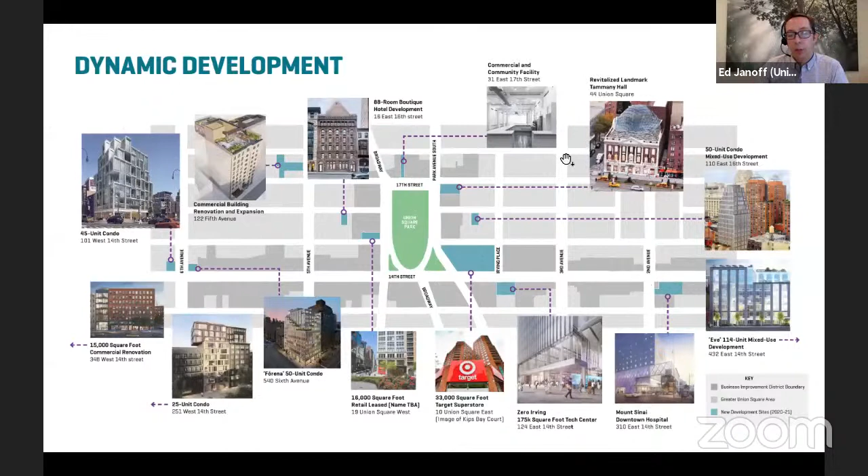We were at subway entrances, in bus stops, in hotel lobbies, really trying to get the feedback from people of all different stripes here in Union Square. And of course, the online survey. So well over thousands of engagements here fed into the visioning work.

I'm not going to go through every single thing that we heard, but just some of the high level feedback. First of all, we heard people love Union Square and they want to see more of what's good about it, which is just always good to hear.

Maybe sort of obvious. Also, our engagement was happening during the period of the conversations about the L train shutdown and the idea of a busway, and so there's a lot of feedback about transportation in particular and concern about availability of transit and connectivity between transit and safety in the pedestrian environment.

We also heard that a lot of people were interested in seeing more greening and more greenery throughout the Union Square neighborhood. And when it came to the park, we heard that there's been work recently and upgrades recently on the north side of the park, the west side, and the south side, but not the east side, that perhaps the east side feels a little bit neglected and needs some more attention.

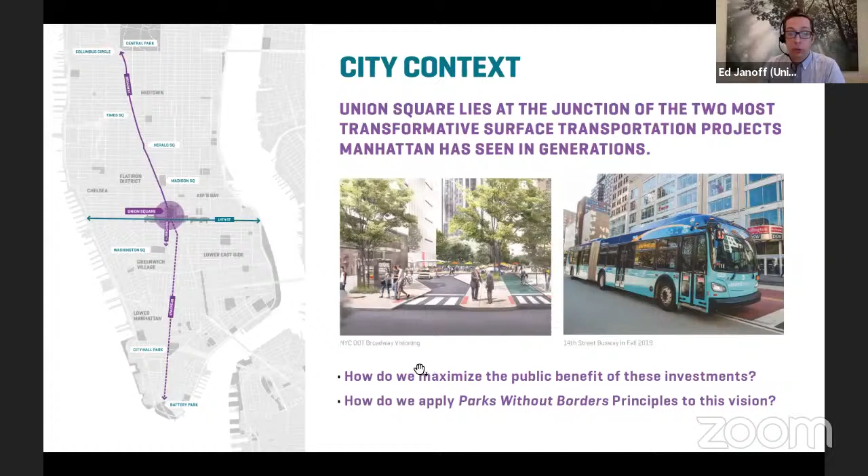So we articulated this vision statement that we think encapsulates some of this feedback and these ideas. The thrust here is really to make Union Square as inclusive as possible and as accessible as possible. That means accessible both in the more literal design sense of being a place that is easy to navigate for people of all ages and abilities, in wheelchairs and strollers, and also a place that provides access to the fundamental features of the neighborhood - access to food, education, healthcare, access to each other, access to New Yorkers. How can the design of the public realm provide that kind of accessibility?

We put together these six goals for the plan. Some of these, if you're used to seeing streetscape plans, you'll see a lot of the time in any neighborhood - increasing pedestrian space, improving access and connectivity, more greenery and open space, historic preservation. But some of these goals are really specific to Union Square.

One is honoring the legacy of the site as a continued place for demonstration and free expression. Second is sustaining the sort of impromptu and organic activities that happen in Union Square that contribute to that really authentic New York flavor that you feel when you're in the space.

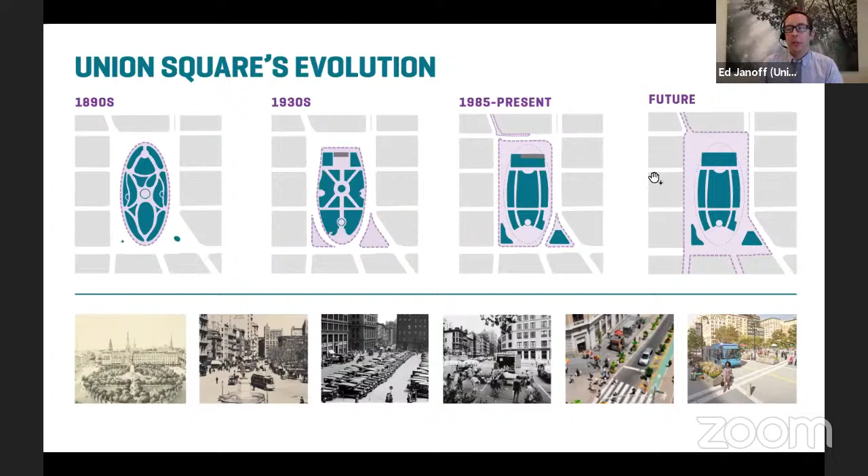So, did I skip a slide here? No, we took it out.

So we asked Marvel, our design team, to come up with a series of distinctive projects so that we could help us organize our thoughts into how we would represent these ideas and how we might actually go about fundraising and building them.

So the 5 distinct projects that I'm going to walk you through here are: first, Union Square West; second, the Broadway Plaza and 17th Street area; third is a 14th Street Boulevard, really not just in Union Square, but continuing east and west throughout the neighborhood. Fourth is the Triangle Park and sort of Union Square East as it connects to the Triangle Park. And then fifth is the park interior.

So I start on Union Square West, and I start here because the design ideas for Union Square West reflect a transformation that is representative of the concepts for Union Square as a whole.

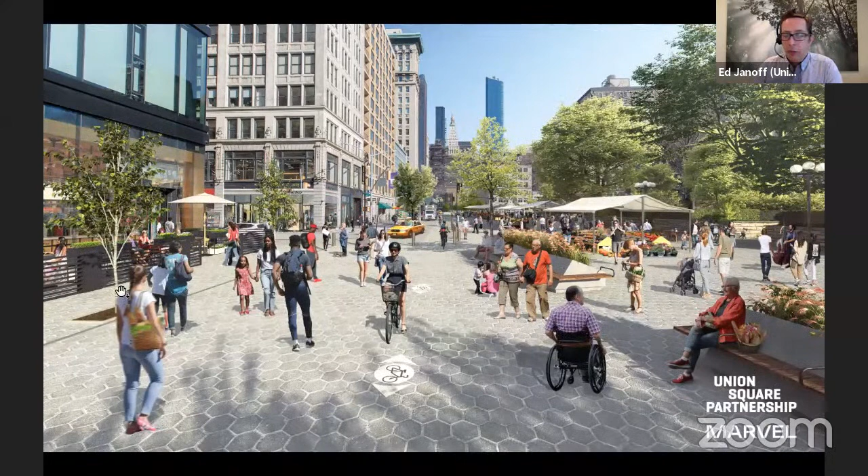So as I go to the after here, what's shown is a continuous paving treatment from one side of the street to the other, all the way from the park to the building edge, and a traversable pedestrian environment that's all at pedestrian grade, integrating potentially a two-way local access bikeway, additional active retail on the ground floor, potentially new cafe space, and more trees along the street and along the park.

We're introducing a concept here that Marvel came up with of a raised planter bench that could allow for additional plantings, flowers or trees, and integrate seating in a way that provides more opportunities to sit and people watch than there are today.

Also showing the potential for some kind of upgraded infrastructure at the Green Market to provide a more consistent look, and maybe a way to not have the line of refrigeration trucks blocking the vistas during green market days.

The space would essentially function the same as it does today. Union Square West would continue to be open to vehicles between 15th and 16th, with the edges of the roadway delineated by bollards to protect the pedestrian space. These bollards would be operable in some manner, TBD, to allow for emergency vehicle access, building maintenance access, etc. A detail to be worked out. Overall, a much more pedestrian-accessible space with more plantings throughout.

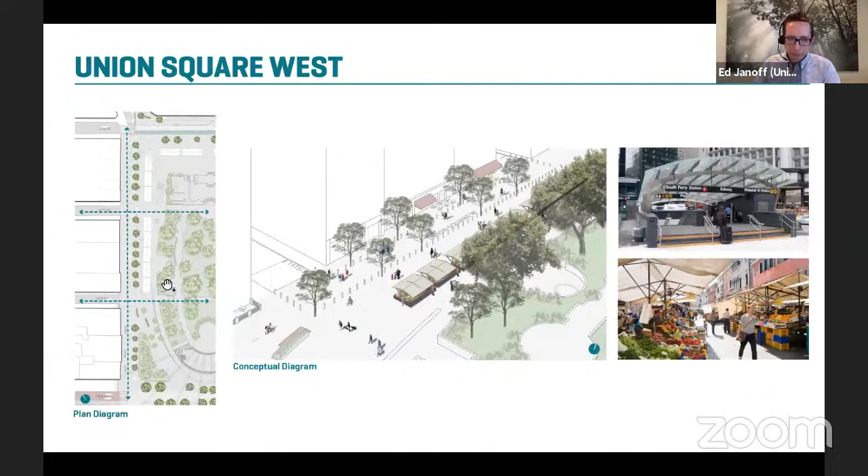You also see in the background, 17th Street continues to move through as a shared street type of space, lower speed, lower volume. And in the background, you're seeing this kind of flexible market infrastructure and the concept of a subway entrance here. Again, it does not have to be that style; the renderer is just borrowed from the South Ferry station.

In plan view and in axon view, really again showing that we're trying to make this a permeable pedestrian space. People like to cross between the Green Market and Barnes & Noble today, but we're trying to formalize that and connect to DOT's Broadway visioning of a pedestrian corridor coming all the way down from Columbus Circle, being welcomed into this gateway to Union Square, where the design starts to unify with the park.

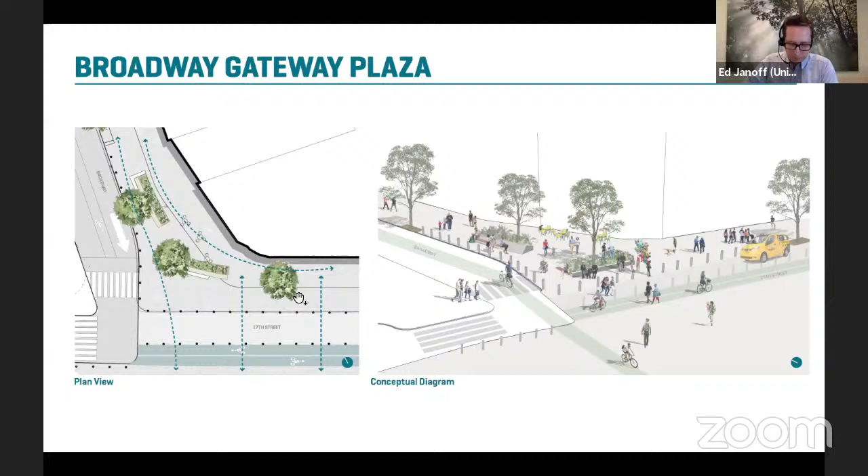Next, I'm going to show you an aerial view of 14th Street facing west at Broadway and the South Plaza of Union Square. The concept on this side is the same, although it's, I think, a much bigger change when you look at it from the aerial view.

The concept is basically the same: unified paving from the park side all the way to the building edge, so that Union Square throughout feels like one continuous space, all at pedestrian grade, with the roadways delineated with pedestrian protection. 14th Street remaining a busway and a local access route.

We heard in the feedback that people in the community were interested in having the open space benefits and greenery of Union Square extended out to the neighborhood, and the design team took that idea quite literally, extending these radial elements of the South Plaza of the square, kind of blasting them out into the neighborhood so that this whole space feels like the South Plaza.

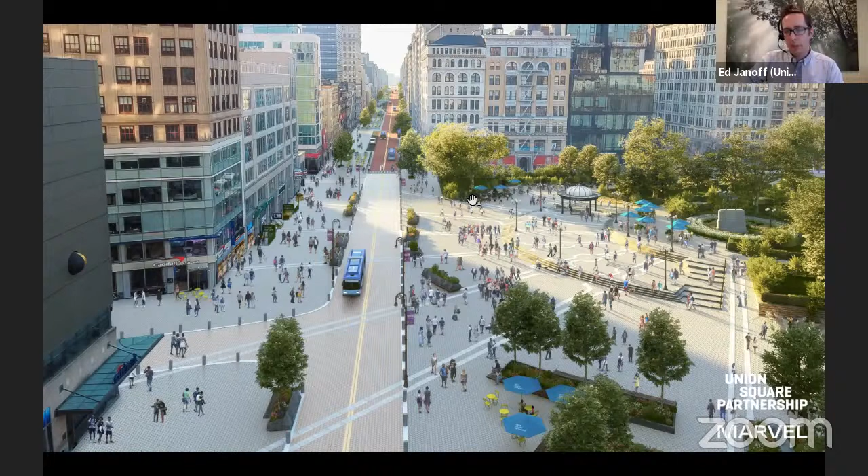And even in this concept, taking this planter bench idea and curving it to mirror the curve of the South Plaza steps, so that this all looks like sort of one South Plaza with a vehicle space moving through it.

This also allows for doubling the sidewalk width on the south side of 14th Street, relieving a lot of the congestion around the subway entrances and providing opportunities for activated ground floor retail. It also doubles the sidewalk width on the north side of 14th Street, just to provide more gathering space, more social distancing space, and more room for pedestrians to alleviate congestion.

This is going to bring you down onto 14th Street to show some of these concepts in more detail. This is 14th Street facing west from eye level, and here you can see the unified paving scheme across the street with the radials pulled out.

The busway here, in this view, you can see that the raised planters can double as pedestrian protection. So you don't have just bollards here, but you can have integrated bollards and planters.

Here you can see the wider sidewalk, potentially activated ground floor retail, and overall this continuous feeling of being in Union Square on both sides of the street.

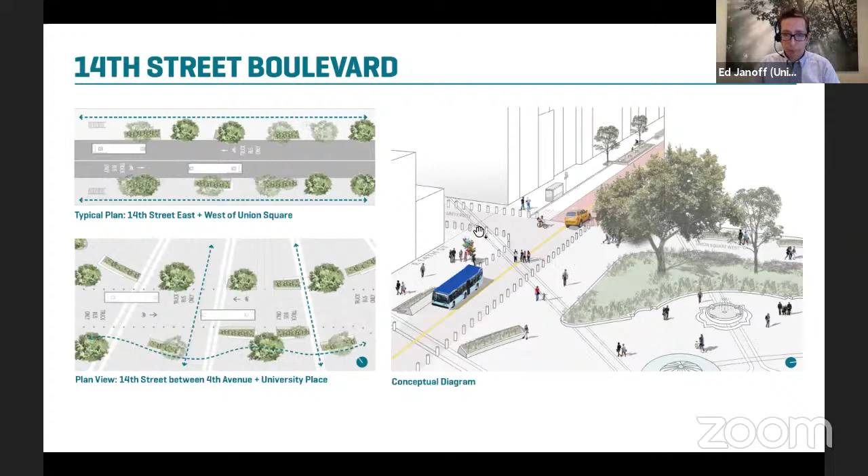And then finally, I'm going to show a concept for the Triangle Plaza, which is at the southeast corner of the park at 14th Street and 4th Avenue.

This was one of the spaces that we universally heard from the community needed to be improved and maybe rethought. So this was really the one part of Union Square that the design team took a crack at reimagining in some way.

What they noted was that it's a space that doesn't have very good circulation. It's got narrow pathways, poor sight lines, no good drainage, no irrigation—it's kind of a dust bowl. And it doesn't really honor the way people want to walk directly to Union Square.

So the concept was—and you can see, I'll use this tree here as a marker for where you are in the before and after—

The idea was to open up the plaza space to through movement going directly into Union Square. So from 4th Avenue and 14th Street, you'd now be able to move northwest through the park, and we would provide more different types of seating—not facing only to the interior, but a mix facing both interior and exterior—seat walls, benches, movable seating, all different types, with a lot more circulation space and pedestrian access throughout.

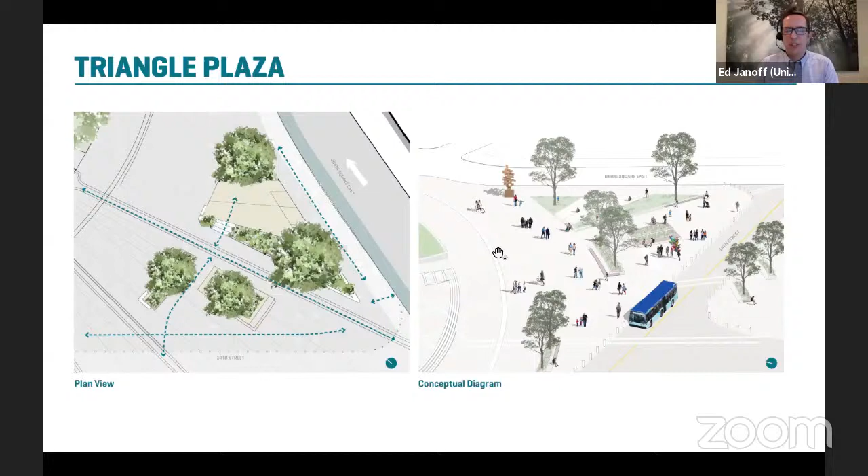That necessitates somehow diminishing or potentially eliminating the northbound traffic on Union Square East. That idea really requires further study, but it's the leading inspiration from the design team, saying this public space might function best if directly connected to the park—with the caveat that this needs a lot more study and could function in many different ways. But it was rendered, for the purposes of nice renderings, as one contiguous public space.

The last significant project of the five was park infrastructure. This is not something we rendered. The idea is not to do anything dramatically different for the interior of Union Square Park, but just to note that it hasn't been master planned in over 40 years, and a lot of the park infrastructure is now aging out, being 30 to 40 years old.

This is sort of a catch-all aspiration in our vision plan, saying the park needs to be renovated—it's a laundry list of needs. The trees, 75 to 150 years old in many cases, are aging, and we need a plan to preserve them but also a succession plan for when they eventually die off.

Renovating subway entrances, landscaping, a dog run—the plumbing is starting to fail, the electrical is starting to fail. A lot of work needs to be done in the park as a whole, probably combined with upgrades to the subway as well.

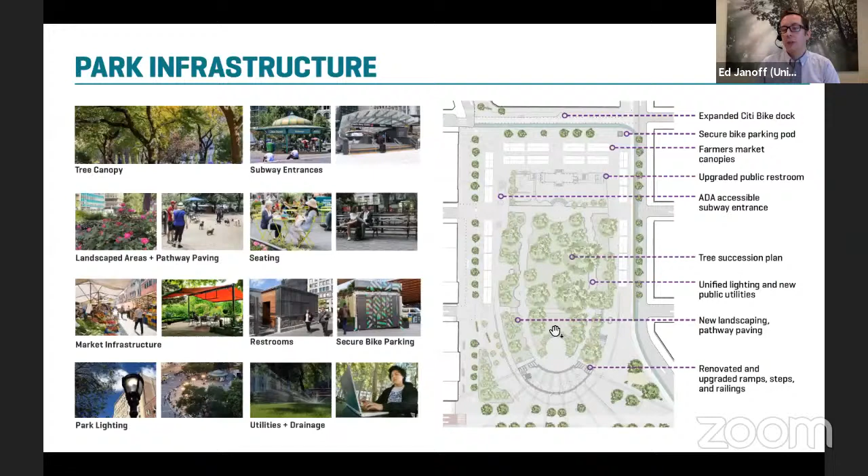Lastly, not one of the 5 major projects but a totally separate idea, the designers proposed a streetscape toolkit—individual street furniture elements that could be deployed throughout the neighborhood, not just around Union Square or on 14th Street, but throughout the whole BID and LDC service area.

First and foremost is outdoor seating. This became especially evident during the pandemic—planning started before it and had to be reevaluated throughout to make sure proposals still made sense. Outdoor seating is of critical importance. We heard that the South Plaza of Union Square is an incredible people watching space in New York City, and on a nice day it's jammed—you can't find a seat, and people want one.

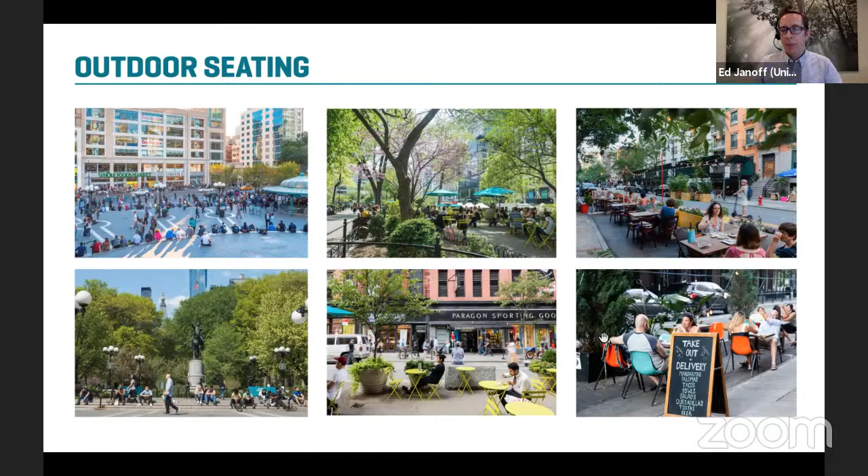So we're looking at a diverse array of seating types and places throughout the neighborhood, including pop-up seating and even cafe seating wherever we can get it.

The main novel seating type this design team came up with is the planter bench. It's a literal interpretation of the South Plaza's great people watching opportunity—how could you replicate that throughout the neighborhood, perhaps on a smaller scale along 14th Street or elsewhere in the district?

Shown here in section, possibly angled, with trees or flowers. We're also trying to leverage DOT's Street Seats program beyond just food service locations—installing these as a BID, maintaining them to provide additional public space and relieve pedestrian congestion. If installed near elevated tree benches or planter benches between two trees, you could create a kind of micro park throughout the neighborhood. Something we're excited to explore.

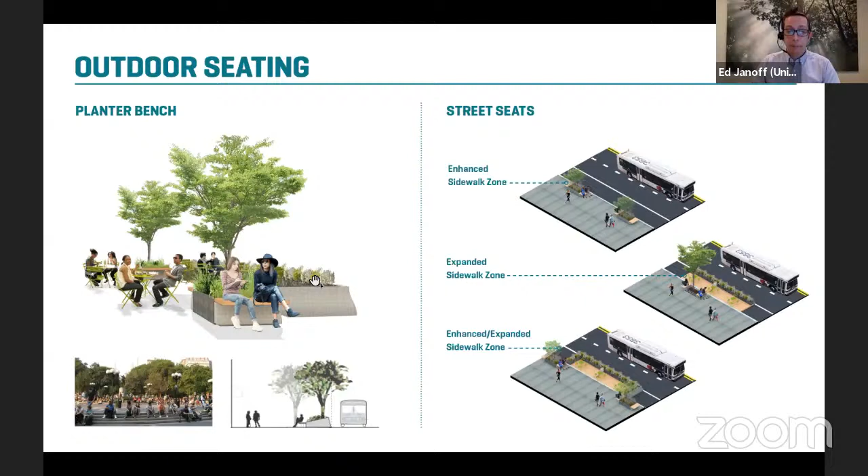Other ideas in the streetscape section of our vision plan: Marvel was one of the design firms that responded to the city DOT and Sanitation's request for expressions of interest for a prototype waste container that collects trash from multiple establishments, keeping it in the parking lane and off the sidewalk, cutting down on vermin and leakage, and allowing carters to access it from the back. That's something we'd like to explore with Marvel.

As for security features, the idea is that the pedestrian realm around Union Square would have elements to protect it, improving upon the granite blocks currently there, with certain points operable to allow access as needed.

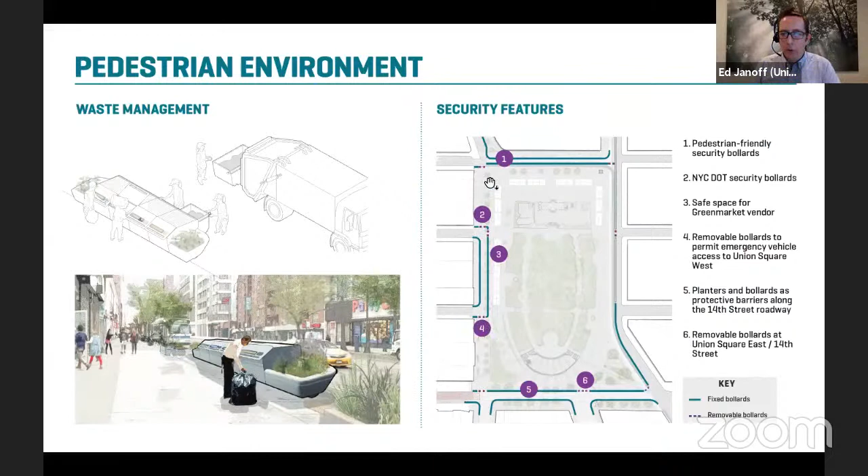Lighting is also key—developing a plan mainly to replicate the historic Bishop's Crook lampposts along 14th Street throughout the area, and upgrading all park lighting to LED. We're also looking at facade lighting, since many beautiful facades around Union Square lack decorative lighting, which could dramatically improve the neighborhood, as well as introducing moonlighting from building rooftops down into the park, like you see in Bryant Park.

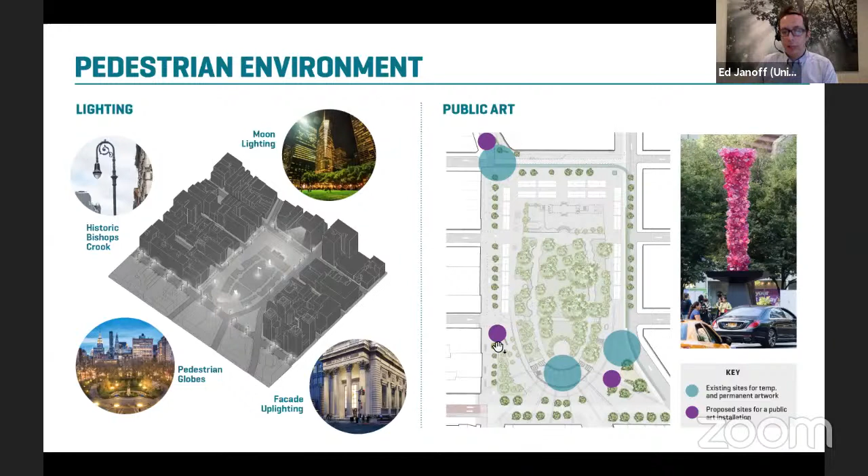That could provide a nice wash or glow of color on the public spaces for upgraded security. Finally, public art is already something Union Square Partnership cultivates with the Parks Department and DOT—seen at the Triangle or the Plaza at 17th Street and Broadway. We'd like to continue this and look for enhanced opportunities in expanded pedestrian areas at the Triangle, Union Square West, and on Broadway.

So finally, implementation and next steps. At the back of our plan, there's a matrix of all the projects that lists them, categorizes them in terms of their priority, how expensive they'll be, how much time they'll take, how complicated they are, and also which of our goals they hit.

It's just a tool for us to help organize our thoughts about how we want to move forward with all of these different ideas. There's also a very rough funding plan in the back. You know, all of this work, including the subway work, could cost upwards of $100 million.

That's a ton of money, especially in the current fiscal environment. As a BID, part of our role is to be a steward for the neighborhood to continue this kind of thinking and continue investment, even when the city might be financially strapped.

So we will continue to use our funds to advance some of this design work, maybe to implement some of these short-term projects like the street seats or tree planting, things that we can do sort of more quickly. We'll also look at the potential for private fundraising or debt financing, different ways that we can leverage our assessment to front load more work so that we can do some of this building ourselves potentially.

You know, the partnership raised $8 million of the $20 million for the reconstruction of the north side of the park. So we will look at, again, asking the private sector potentially to donate money for some park features. But lastly, we are cognizant of the fact that this will require plenty of investment from city, state, and federal funding. So we will go out and ask for that.

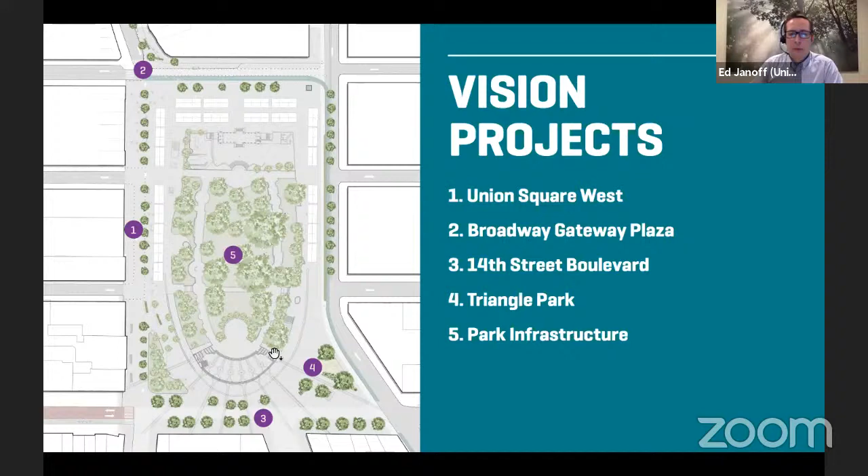So this is how the rendering is shown in the published plan. The team did come up with an alternate design that shows this space allowing some kind of traffic to go through it, some kind of lower volume, lower speed. It's not articulated how that's being fed into here, but it's showing, well, this could still be a pedestrianized space that's kind of permeable and looks and feels connected, but allows for some level of vehicle flow.

We created these diagrams - this is also not part of the plan, just purely as a conversation aid. This is not a proposal, but it's just to illustrate that when you're digging up streets and moving curbs, there's many different ways it could work. It could be some kind of shared street, pedestrian street that still allows an outlet of 15th. 15th Street could be reversed, just getting traffic off of the square. 15th Street could be two-way if that's important.

In fact, it could even be that Union Square East, you might be able to move curbs to the west, get two-way traffic, but below 15th. 4th Avenue potentially below 14th could be reversed, all the way down. 4th Avenue used to be a two-way street going all the way down to Astor Place, and I think all the way down to Spring Street, where Lafayette and Centre kind of mix. So that is much bigger than anything we're proposing today, but all of that is just to say there's a lot of different ways it could be worked out when we hear more feedback and get more details from a network level analysis.

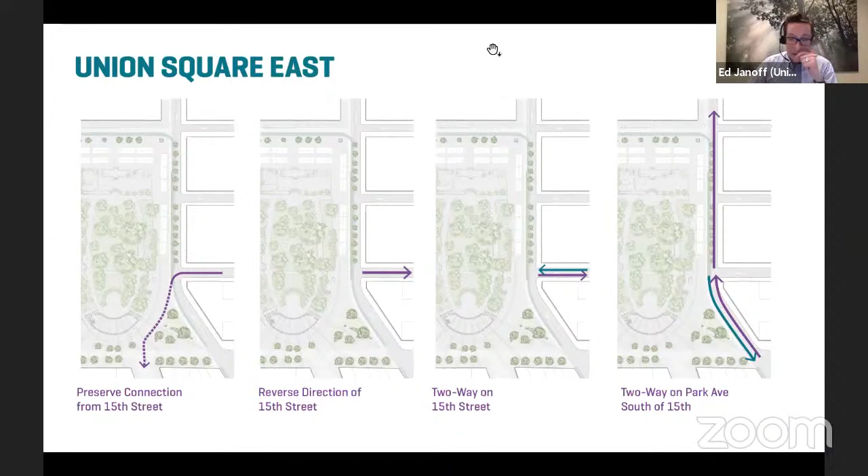Yes, I just wanted to add on to the train of thought that just came out here. It's a fairly simple concept to have a cordon toll around the Manhattan CBD. The question really, and that's money in the bank supposedly, is what are the traffic ramifications? And particularly, what are the potential benefits of turning the dial down on traffic in the core of the district? That really means the six community boards in this area south of Central Park need to have a coordinated, comprehensive view of where they want to go.

There is no such thing. We don't think that way in New York. Everything is ad hoc, battling each other at the last minute. I think it's a terrible mistake. We should be insisting, with our board being smack in the middle of this, that there be a comprehensive street use plan for the entire congestion pricing zone, which is the Manhattan CBD south of Central Park. Thank you.

Thanks, George. Anyone else from our community board committees who have either questions or comments for the presenters?

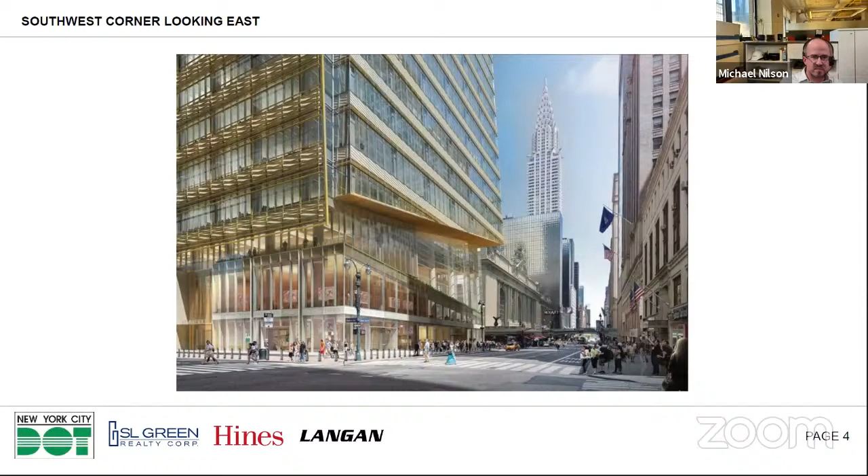And what is often a concern is the style of the bollards—we heard it earlier tonight from one of the other applications. Grand Central has distinct bollards. These are not the DOT standard, but they are bronze with a ring approaching the top and a rounded top. So the decision with DOT and PDC some time ago was to extend this style bollard around One Vanderbilt, so we are not introducing a new material or anything like that. There'll be a consistent bronze sleeve with the ring and dome top.

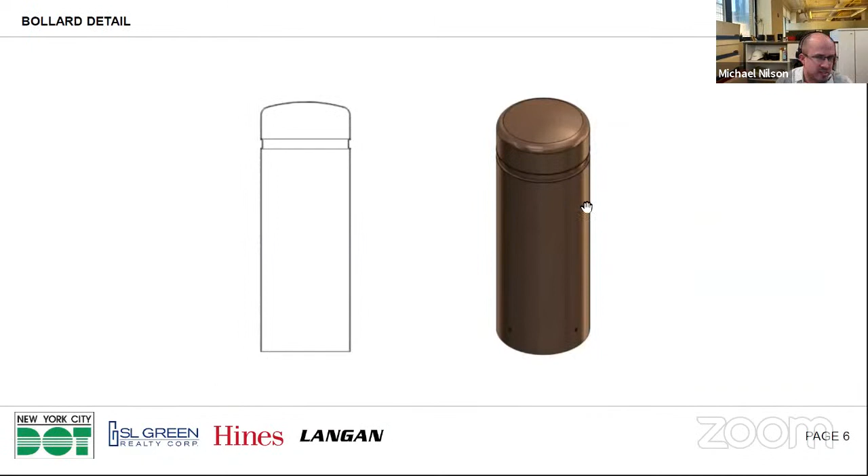And this here is just illustrating that again—this is one of the renderings for the actual bollard on the project. That's really all there is to it. Happy to answer any questions the board might have.

Thanks, I'll open things up to questions from the committee, although I have a couple myself to start. Number one, you mentioned the bollards were designed with all the necessary city agencies—I'm curious where the final approval decision lies. The bollard design process has always been a little opaque to us at the community level. Who does the final sign-off on a design and security posture that's considered adequate? Who puts the final check mark on it?

So the final check mark is sort of shared between PDC and DOT. PDC has the ultimate final check mark on the look and feel of everything. DOT has the final say on the use of the public space, or the volume of space occupied by the bollards in the public right of way.

And you mentioned you were coming to us because it was an expected and required part of the process. Whose process exactly—is it PDC's process? It is the DOT revocable consent process. DOT's revocable consent, right.

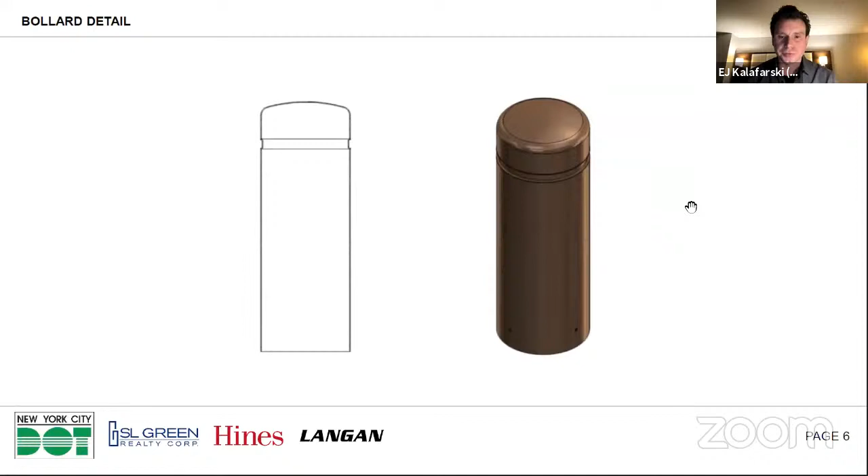I think the one other thing I was going to ask is, you had an illustration of the bollards in relation to the existing ones. If those existing bollards, if Metro North figured they could remove them, which to me common sense would seem to indicate... No, I'm sorry, it was a rendering. Maybe two slides back. Sure, this one, yeah, exactly.

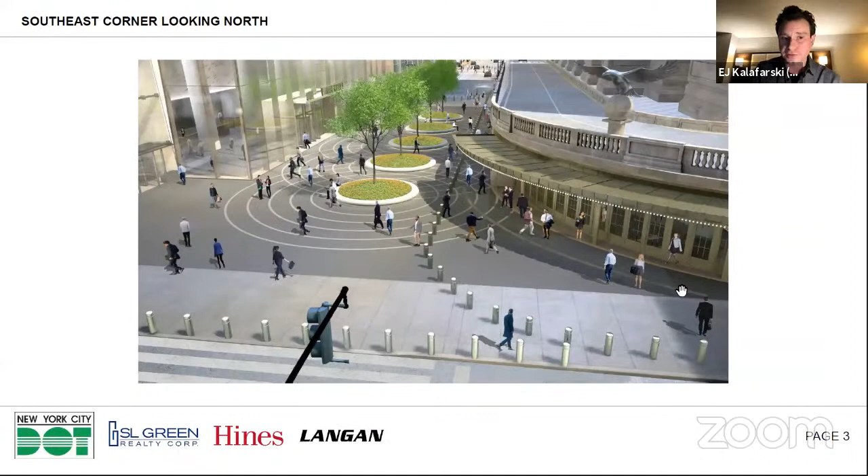Okay, if Metro North decided those were redundant and could be removed, the new bollards extending west around One Vanderbilt don't actually line up with the bollards that would continue in front of Grand Central. Did you just assume those bollards would never be removed, and that the two systems wouldn't really link up at all, or am I reading this rendering wrong?

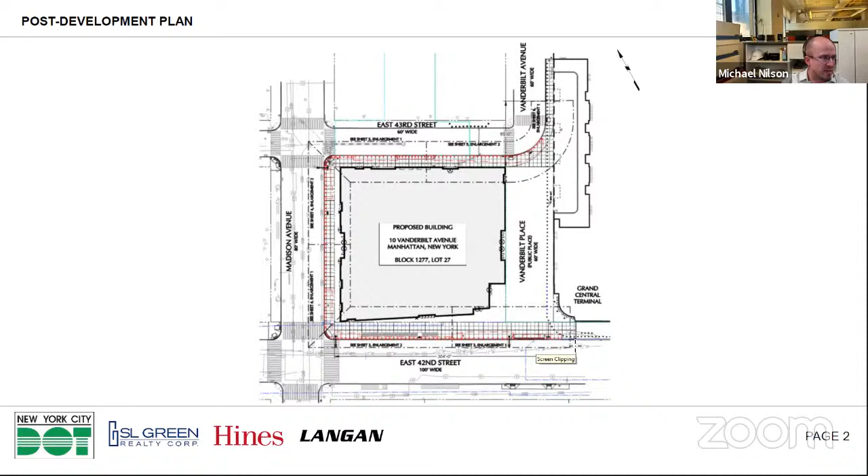So I'm going to go back to the plan here, which is admittedly difficult to make out at this scale, but the location where the new bollards essentially meet the Grand Central bollards, that spacing is as required to maintain standoff distance. So it might be a matter of this bollard being the last to remain, and then additional ones could be removed, whatever the case may be.

But theoretically there'd be no issue with removing these from the One Vanderbilt perspective. There'd be no issue with removing the so-called redundant bollards.

Yeah, I guess I'm just asking if the redundant bollards were removed, the two lines of bollards on the curb side would not really line up. Is that correct? Correct, they would, yes. They would be offset because the Grand Central existing bollards are set back farther than DOT standard from the curb line. And there's challenges as you move west along 42nd Street with transit vaults and ventilation structures - even if we said let's set it back another two feet or so, that wouldn't have been possible.

I see, okay, thank you.

Sure. Harry, are you still with us? Have you been able to speak? I saw your hand was raised. I guess not.

With that, do any members of the committee have any questions? Joel.

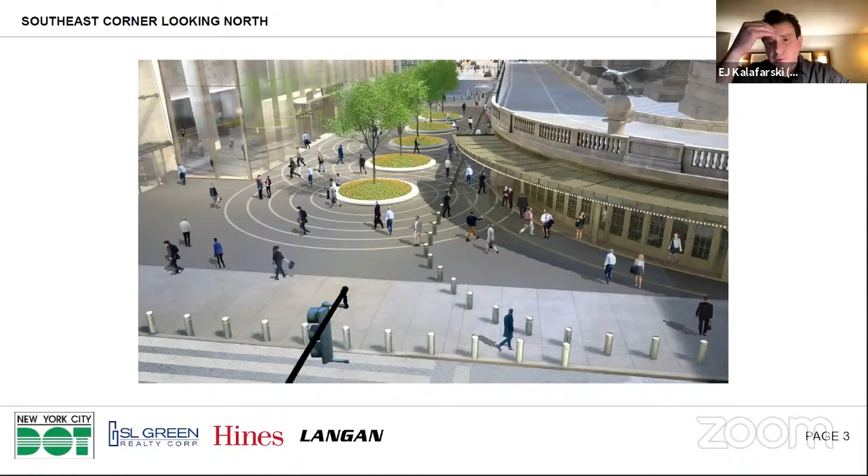I suppose I'm curious at this point - Mike, this question may be for you, or it may be for Colleen at DOT. I'm still essentially trying to determine what is the most productive role of the community board to play here in chiming in on this revocable consent. We don't get very many of them on the Transportation and Environment Committee.

I'm sorry to interrupt you, EJ. Go ahead. Omar Torovaca from Kassir's office said that he can help, I believe, on this topic. He just sent me a note. If you can allow him to speak, if you'd like him to speak, feel free. I'm not sure what that entails.

Yep, we can make that happen. Or Omar, you're permitted to speak now.

Thanks, EJ. Yeah, I've been representing SL Green and working with DOT on the outreach process for this entire approval. So just for your reference, the plaza has been before Community Board 5 before going to the PDC on the design and layout that you see illustrated in this rendering. At that time, there were a bunch of questions raised about the redundancy of the bollards, and it would have been the applicant's desire to see the redundant row disappear.

But what we learned in the process and in conversation with DOT was that, in fact, these are federally funded bollards run by Grand Central as a measure put into place with, I guess, funding to combat terrorism. And based on that premise, New York City DOT did not feel like they could approve their removal. They preferred to have the redundant row there, even though the applicant had originally presented a design that did not.

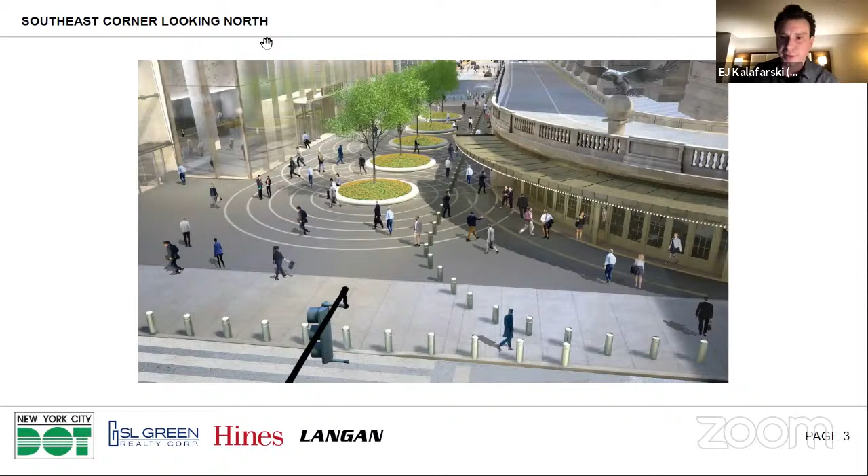A lot of other community boards also hear presentations on revocable consent. Our role, the city DOT's role, is to have the agencies or companies come before the community board and give the presentation. It's more informational. Most community boards vote in support of these revocable consents and send resolutions to DOT stating they have no objections with moving forward with the agency's presentation.

If you feel that's something the board or committee wants to take on by sending us a resolution, that's great, we welcome that. Or I can just let our revocable consent division know that the presenters came and gave a presentation to the committee, and there were no major objections raised about this particular project. It's up to the committee how you want to handle it.

Okay, thanks Colleen, but it's informational, just so you know. Seeing no other questions from anyone on the committee, I'll throw things over to our dwindling members of the public. Any questions or comments?

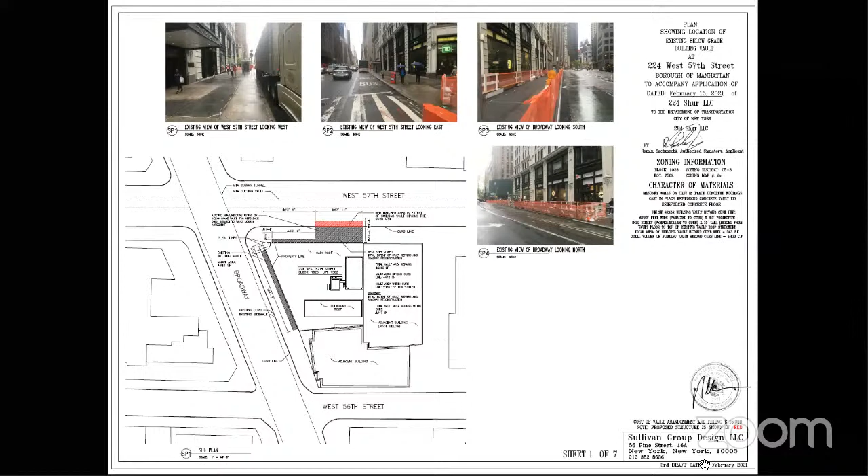Here's a plan showing the sidewalk plan, and you see the vault outlined in red at the top of the sheet, the portion that goes beyond the curb line. And this is the plan showing the structures within the vault, meaning the structural elements, outlined in red once again.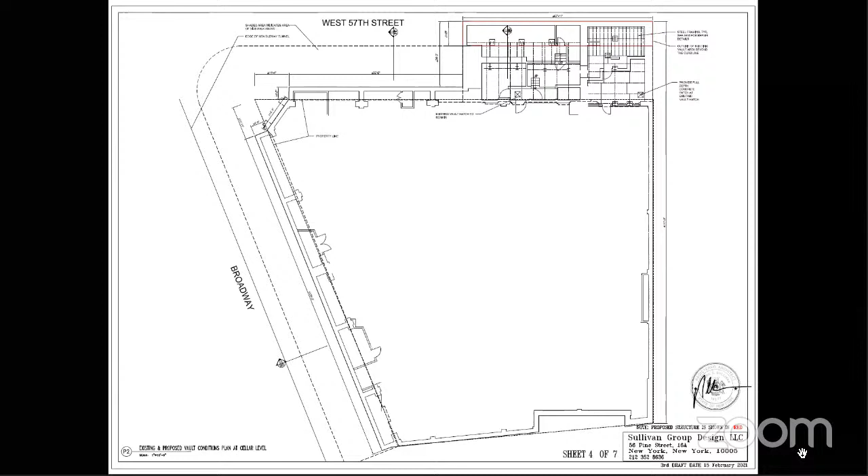Just another plan with slightly redundant information. And here's the vault section - you see the floor of the vault, the lower part, has multiple different levels. Up above, you see the building facade on the left-hand side of the sheet, the sidewalk going out to the curb line, and the portion of the vault outlined in red, which extends beyond the curb.

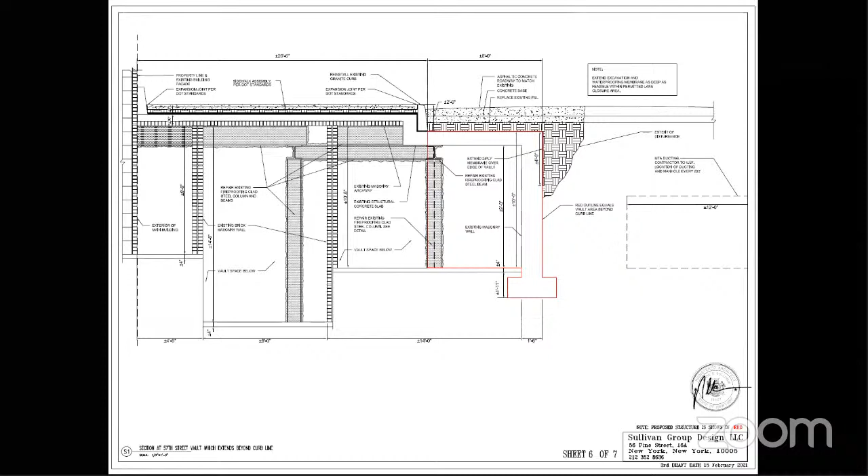And some other sections showing other vaults on Broadway as well as 57th Street, which tend to project beyond the building line only 4 inches or so. And that's Building Vaults 101.

Okay, thanks very much. Did you have any other information, or should we turn things over for questions at this point? There's no additional information.

I have one or two questions, and then I'll let the committee ask their questions as well. You mentioned that the vault exists now, coming out to the same point, extending beyond the curb line. Is that correct? That's correct. So I understand the work that is planned is to essentially rip up the curb and install a new surface below, then restore the curb.

If I've got that wrong, let me know, but I'm also trying to understand the work that is to be done. I am wondering why a revocable consent is required now, but there isn't an existing one. Most building vaults, going back to the days of yore, are now grandfathered, and the grandfathering is different depending how far out into the street the vault goes. If the vault is within the curb line, it's grandfathered, and you can either get a vault license from the City of New York or not—it's up to the applicant. Sometimes it depends upon the ownership structure of the building as to whether you want a vault license or not. A vault license, for informational purposes, is basically an agreement with the City of New York as to the uses you'll place within the vault, and the fact that they're granting you a license. So if you had a building vault below a sidewalk that you were going to rent to a tenant, you would probably want a vault license to spell out in black and white what the owner's obligations are and what the tenant's obligations and duties are as it relates to that vault.

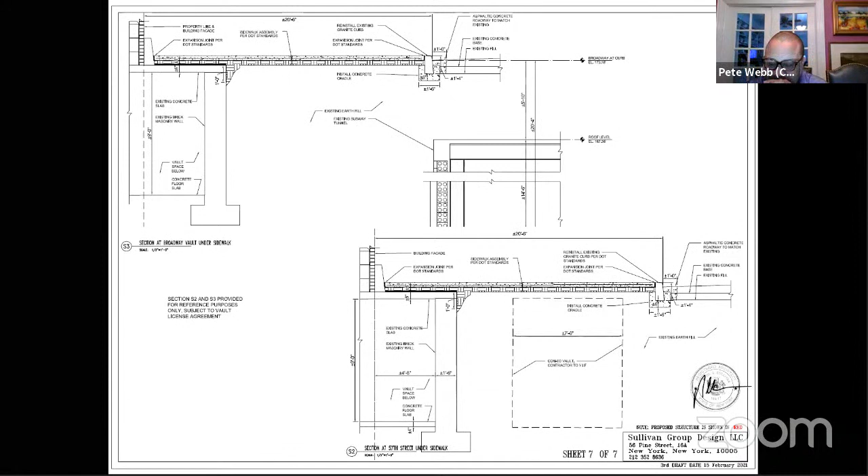Okay, thanks Pete. So far it sounds like the consensus is more or less to approve, with some of these comments and caveats in our resolution. Joel's also nodding his head, I can see. Any other comments from any members of the committee? Not seeing any, I will entertain a motion if someone would like to make one.

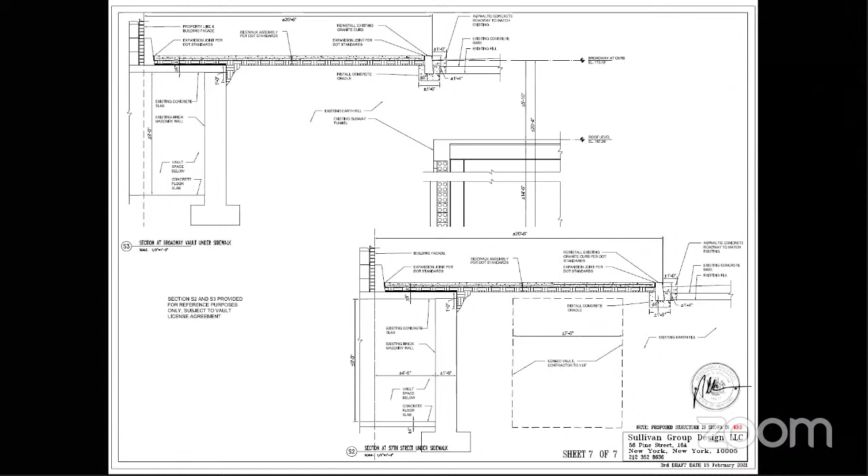Such as a motion to approve with the comments that we've mentioned. Move to approve the application, including the comments shared in the discussion just now. Second. Thank you, we have a motion and a second, so we will take it to a vote.

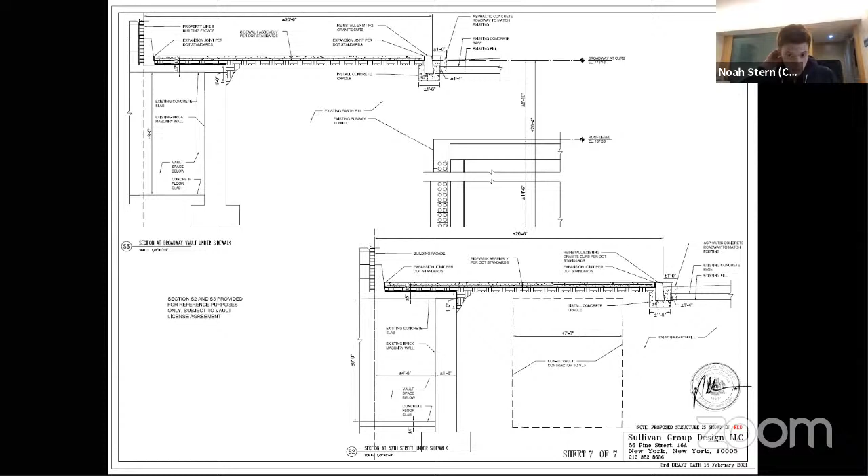Clark - yes. Dowson - yes. Goldman - yes. Gushow - yes. Hartman - yes. Pawson is gone. Raybar - yes. Stern - yes. BJ - yes. Simon - yes. Pete - yes. Whalen - yes. Hykalis - yes. Maxman - yes. Levy - yes. And I am a yes.

So the motion passes, the motion to approve passes. Thank you very much, Mark, for teaching us about vaults and vault history. As was mentioned earlier, this will go before the full board in about 2 weeks' time, at which point it'll be voted on by the full board. You're of course welcome to attend and speak during the public session if you are so inclined.